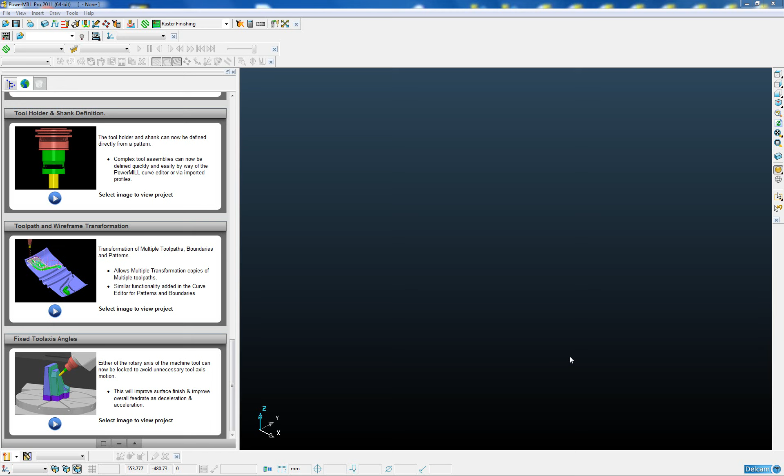Let's open an example project and take a look at some of these new toolpath transformation options. In this simple tread mould, we have two toolpaths, a roughing toolpath and a finishing toolpath. We're now going to mirror and transform this toolpath to give us the complete mould.

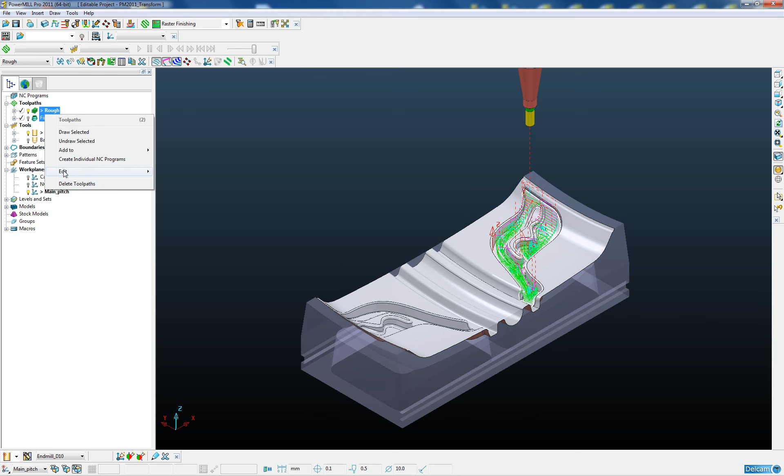So to do this, we need to select both of the toolpaths, right click on the toolpaths and say Edit, Transform. The new improved toolpath transformation toolbar pops up, and the first thing we need to do is mirror both the roughing and the finishing toolpath about the centre line of the tread mould to give us the opposite side.

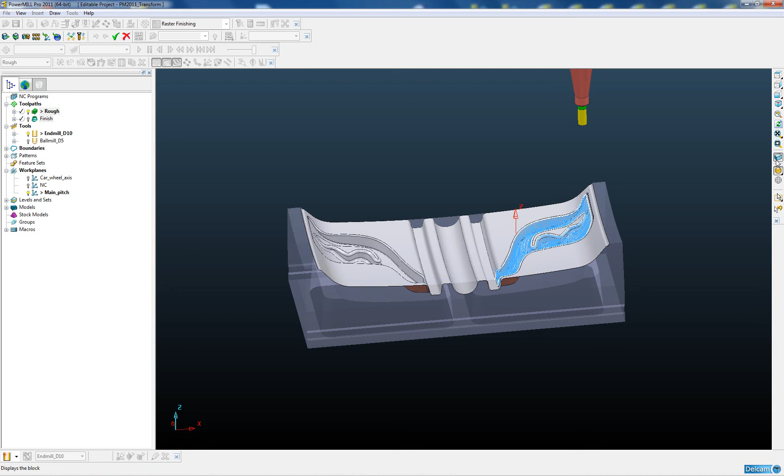You'll notice that the actual toolpaths on the screen have turned to a light blue colour. This is an indication to the user that these are the selected toolpaths that we are going to be doing the transformations on. So I'm going to switch on a work plane called NC, which is in the centre of our tread.

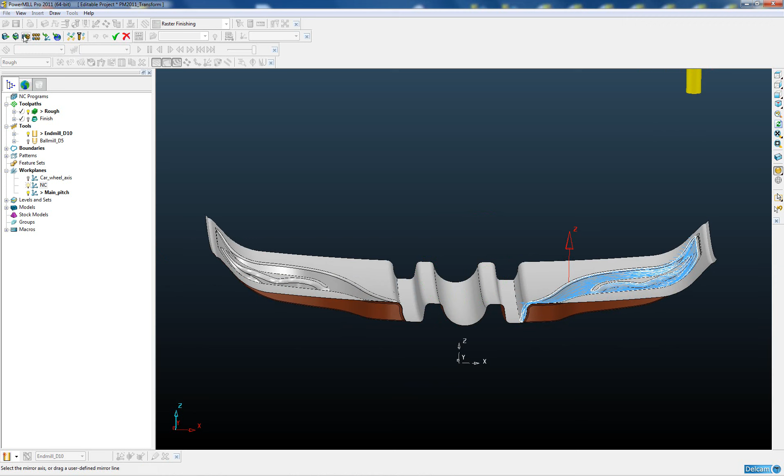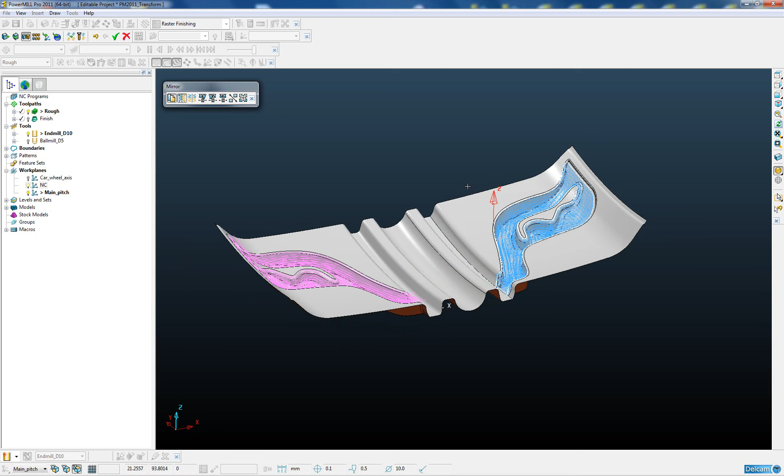And the first thing we're going to do is simply mirror the toolpaths about the centre line. So we're going to reposition our move origin or our mirror origin and snap it to the work plane, and we want to mirror around the ZY axis, so click on YZ. So there we can see the original toolpath in blue and the mirrored copy, which is highlighted in pink.

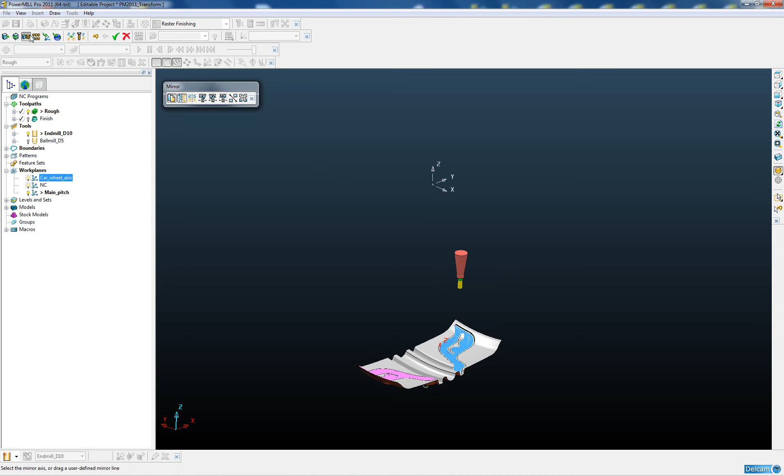The next thing we need to do is create multiple copies rotated about the centre of the wheel axis. So we have a work plane which is at the centre of the wheel. So to do this, we're going to use the new multiple transformation, and we can either create a rectangular array or a circular array. So let's look from above.

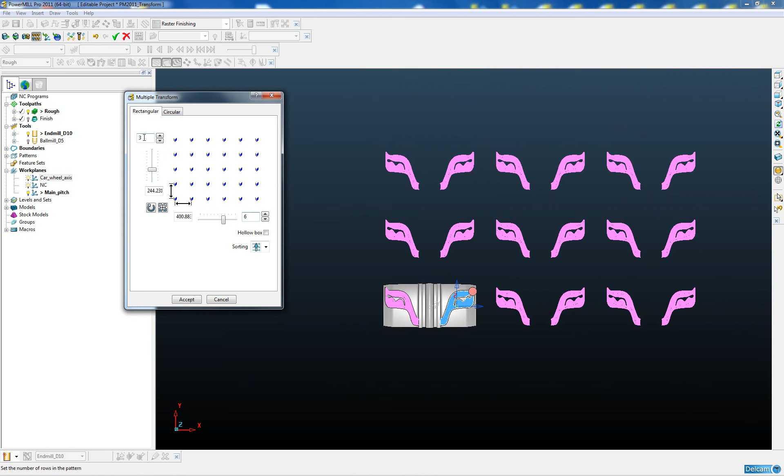So here we can see a rectangular array, and we can just dynamically drag the distance, and we can increase the amount of copies we want in both X and Y. And if we want to, we can remove the centre, so we just have an outer profile.

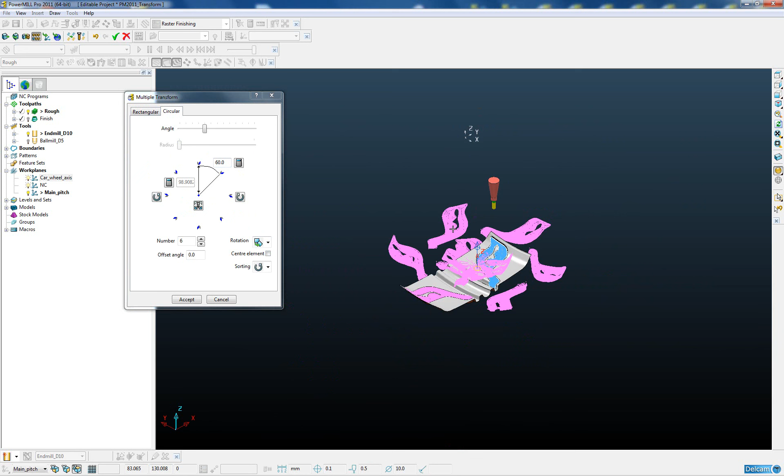For this example, we want to do a circular array, so we're going to swap to the circular tab, change to an isometric view. Now we want our circular array to be about the centre of our wheel axis, so we're going to pick up the anchor point and snap it to our work plane, and we want the centre of rotation to be around the Y axis, so we're going to change our working plane down here in the bottom left corner to the ZX

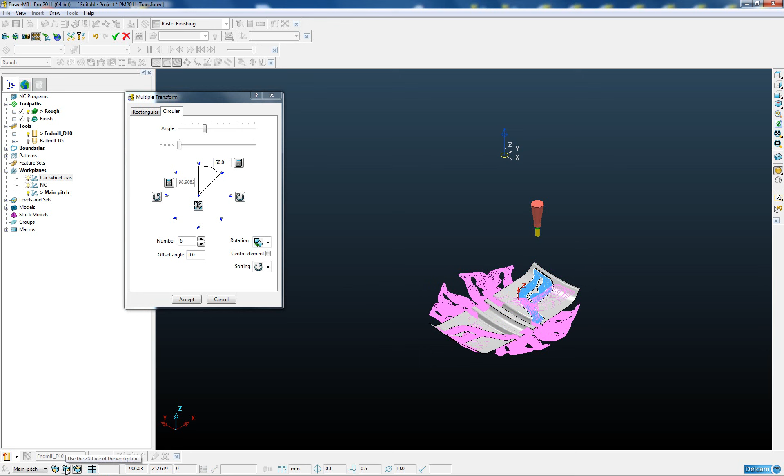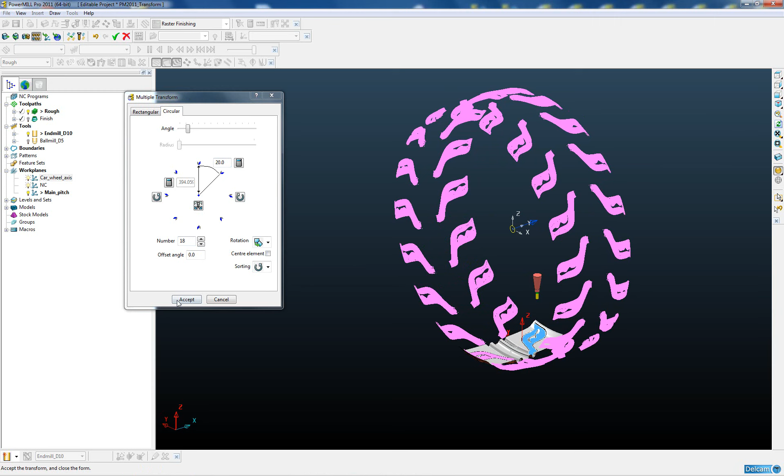X axis, and then we can specify the angle or the number of copies. So we have an angle of 20 degrees, which will give us 18 copies around the Y axis. So we're going to accept that. At any point we can undo if we make a mistake, or redo.

And the final thing we need to do is specify how we want to order the toolpaths in the PowerMill Explorer down the left hand side. There are two options. We can keep the current ordering, so in this case it will be rough, finish, followed by rough, finish, etc. Or we can group the toolpaths based on the tool. So all the roughing will be grouped together and then all the finishing will be grouped together. So we're going to group it based on tool change and then accept the changes.

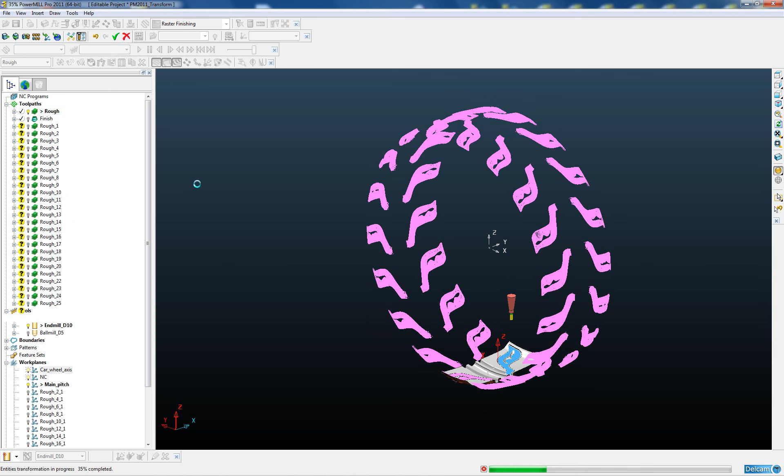And there you can see quickly and easily the roughing and finishing toolpaths are copied, mirrored and then rotated round 18 times. So there you can see it is now very simple and very quick to do multiple transformations of toolpaths. This functionality is also available for the transformation of patterns and boundaries.